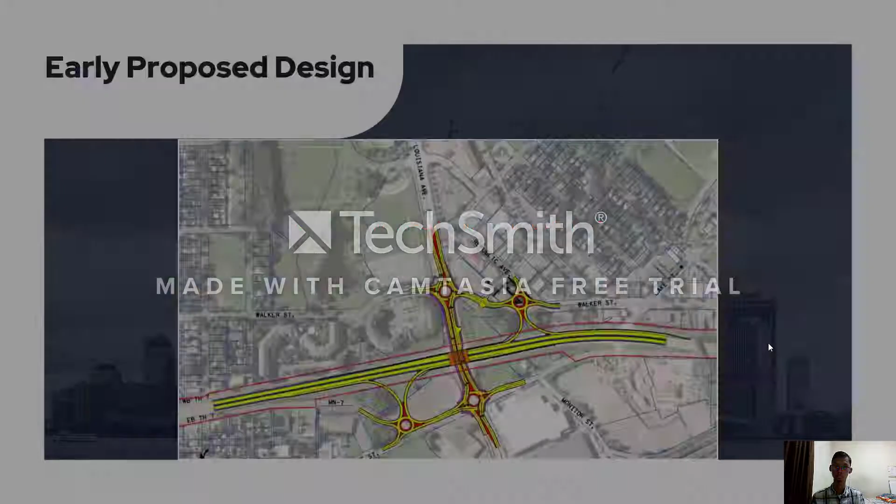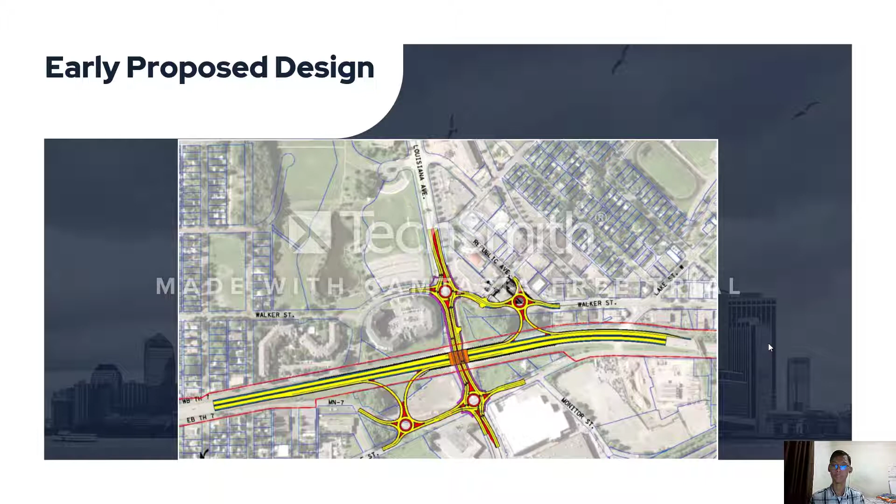And this is the early proposed design. As we can see in the drawing, there are 4 separate roundabouts and 1 grade-separated intersection.

VE objective: A. Conduct a comprehensive review and analysis of the key project issues using a multidiscipline cross-functional team, and then review and improve the proposed design by focusing on A. Improving mobility and reducing the conflict of vehicular and non-vehicular traffic, and B. Minimizing impacts to existing development and enhancing opportunities for future development or redevelopment. And then last but not least, apply the principle and practice of the VE job plan.

The owner of the project gave the VE team some constraints or controlling decisions, such as must accommodate pedestrian and bike traffic, both temporary and permanent, avoid Louisiana Oaks apartment complex, avoid Sam's Club, must close right-in, right-out access at or near RR Bridge upon project completion, March 2012 funding obligation date, and November 2011 letting date, minimize right-of-way impact or acquisition and excavation, because there is a high potential of contaminated soils on the surface.

And then EA process just starting, draft document out by October 2010, must mitigate impacts to floodplain, no net increase in 10 and 100-year flood elevation, strong desire to not impact pump station and medical office along Lake Street, strong desire to not impact medical office along Walker Street, avoid impact to 4F, desire to minimize impact in southwest quadrant of IC. And then there is the performance attribute.

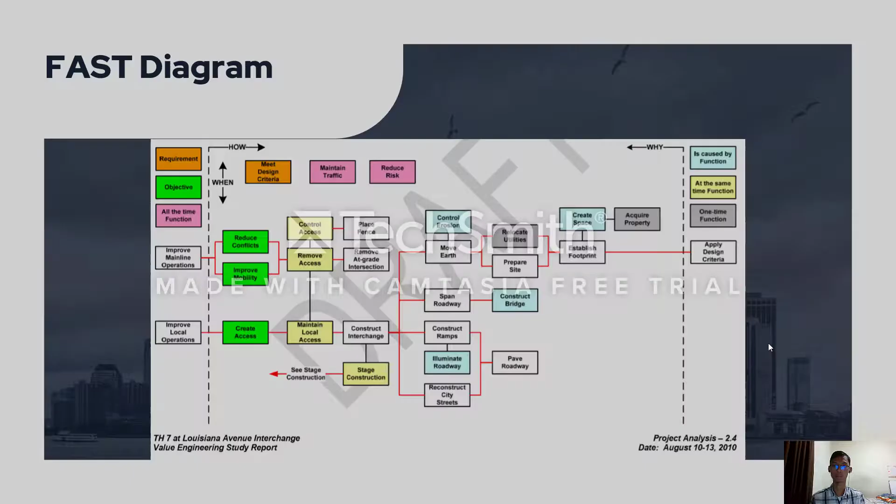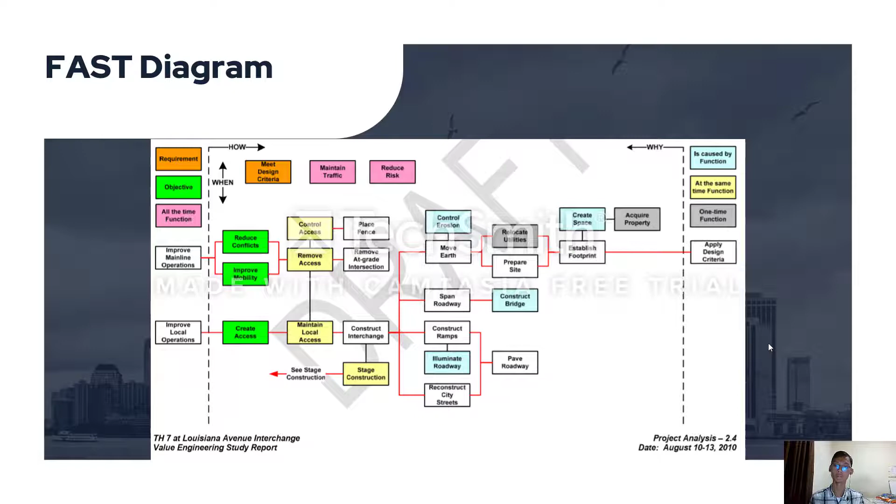And then we can analyze the function that we need to achieve using a FAST diagram. We can see here that the higher order function is improve mainline operations and improve local operations, and we can achieve it by creating access, constructing interchange, move earth, span roadway, construct ramp, reconstruct streets, and so on. And the lower function is apply design criteria.

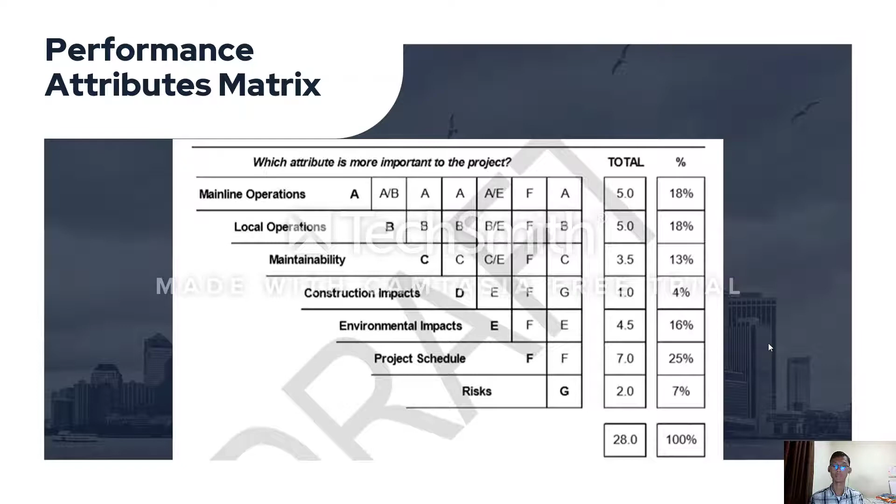And then there are the design considerations, like using mechanically stabilized earth walls, lower the hill on TH7 between Texas Avenue and Louisiana Avenue to acquire material for embankment. With the current low price of steel, consider a steel girder bridge. Create a signature bridge, include transit in final design. Consider the use of rain gardens in a roundabout and boulevard. Use concrete instead of bituminous for the driving surface of the roundabout. Use accelerated bridge construction.

And then there is the summary of recommendations. From all the recommendations, there is an estimated saving from 3.9 million to 5.1 million dollars, with performance improvement varying from 7% to 11%, depending on the implementation strategy. There are three scenarios or strategies, A, B, and C, with a major difference in the design of the intersection. Scenario A uses single lane roundabouts. Scenario B uses a tight urban diamond interchange, and scenario C uses a single point roundabout interchange.

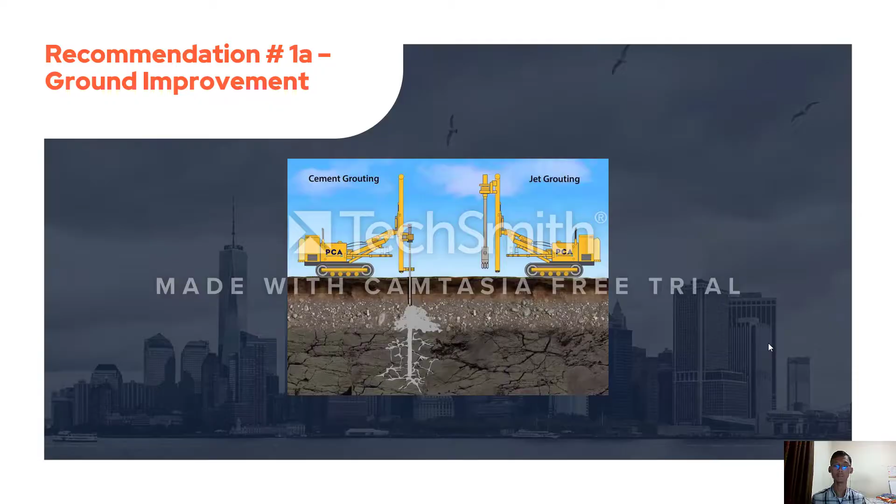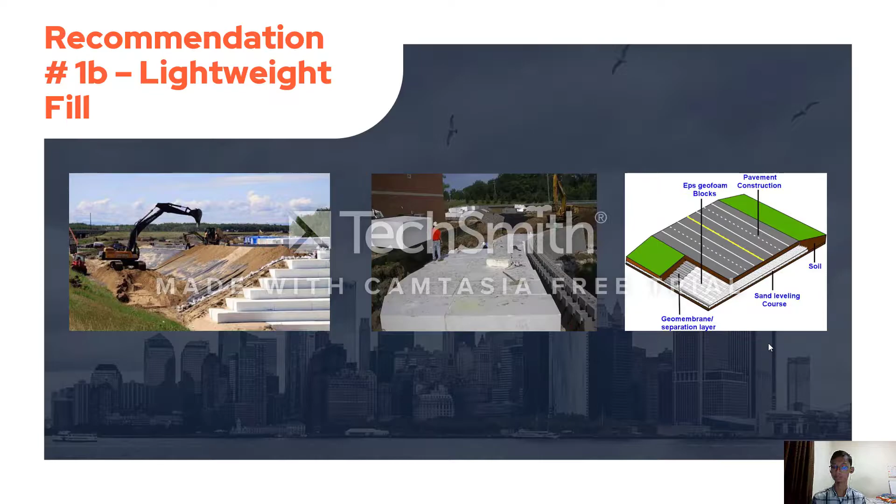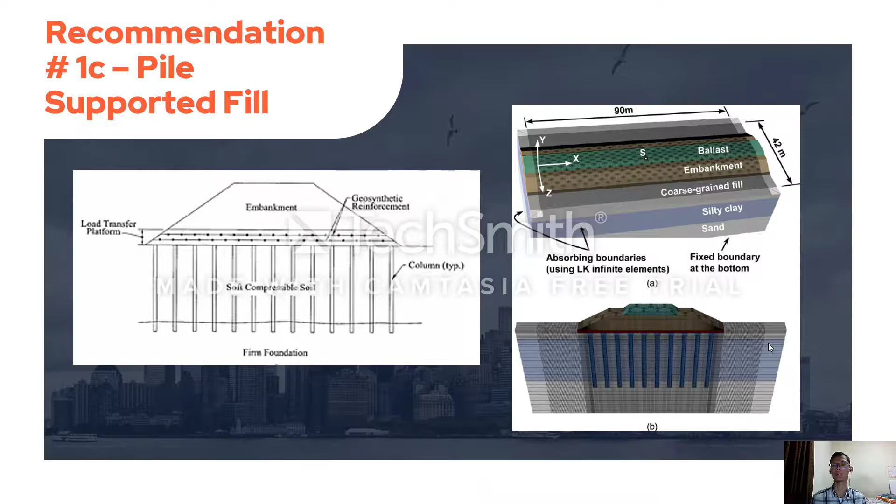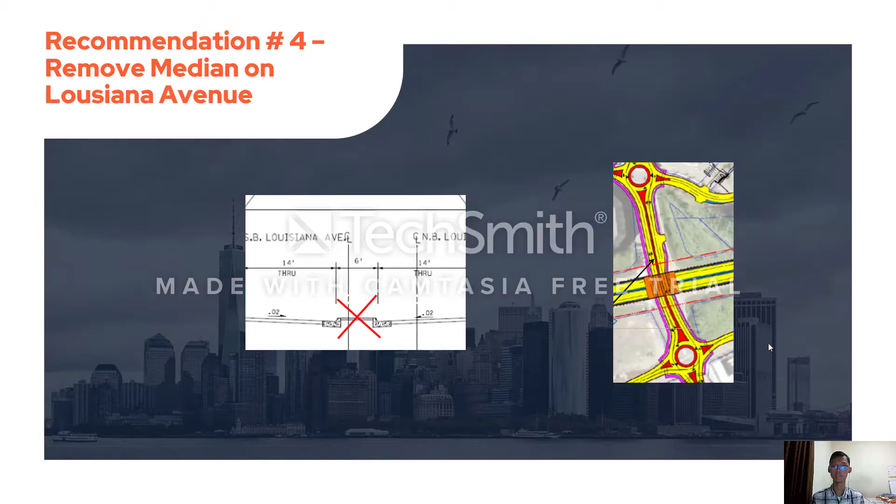And then there is this single lane roundabout. I'm sorry, but this is not the exact design that the VE team proposed. It's just an illustration. And then there is removing the median on Louisiana Avenue, so we can have a more flexible traffic distribution or lane distribution. And then there is a tight urban diamond interchange, and then there is the single point roundabout interchange.